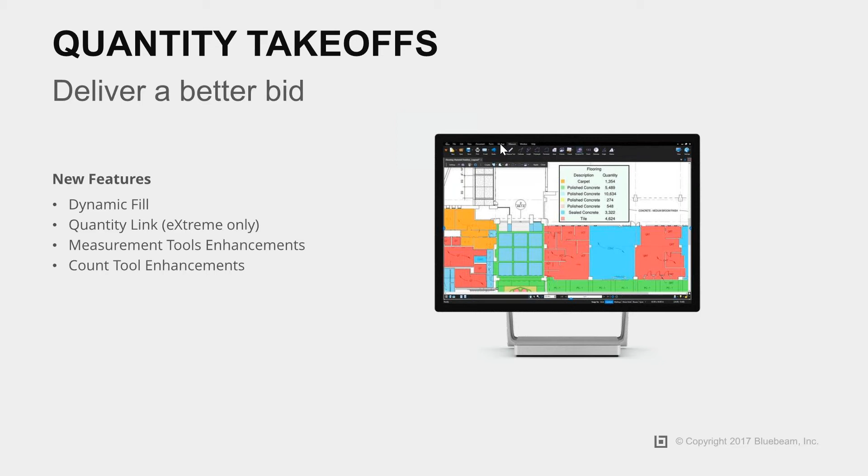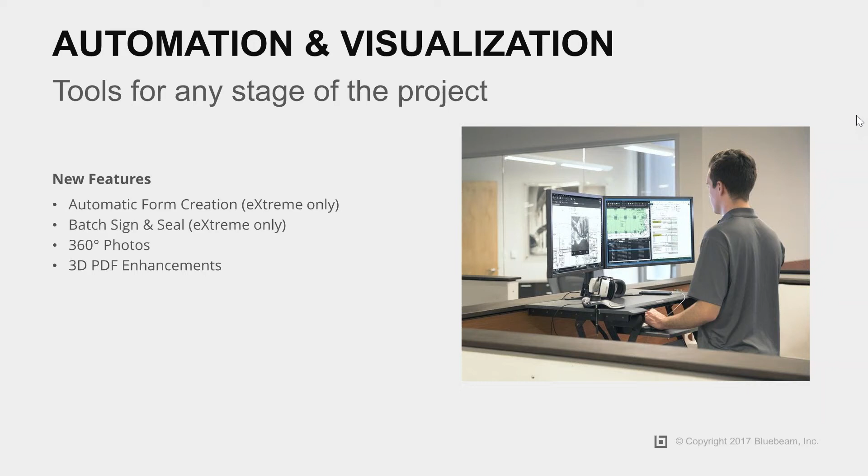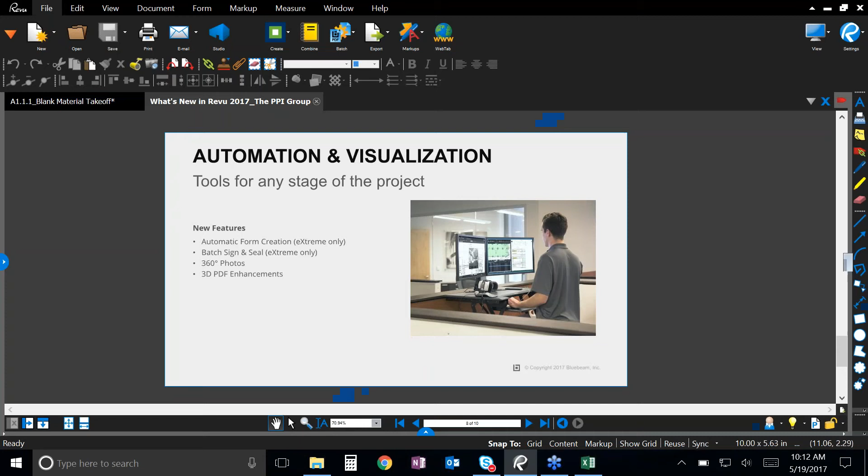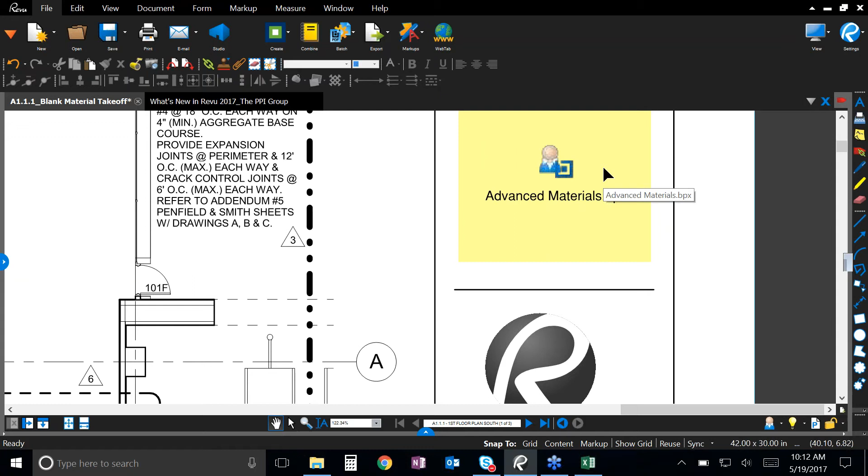Into the demonstration, without further ado. Again, going to be showing you the two buckets, starting off with the takeoff features. Let me go ahead and open up a document here that we're going to be working on. Right off the bat, you'll notice in the corner that there's a profile embedded into this document—profiles are saved configurations of our interface. Someone on my team created a profile with tools and custom columns, so all I had to do to get all the tools I need for today's demo was double click here.

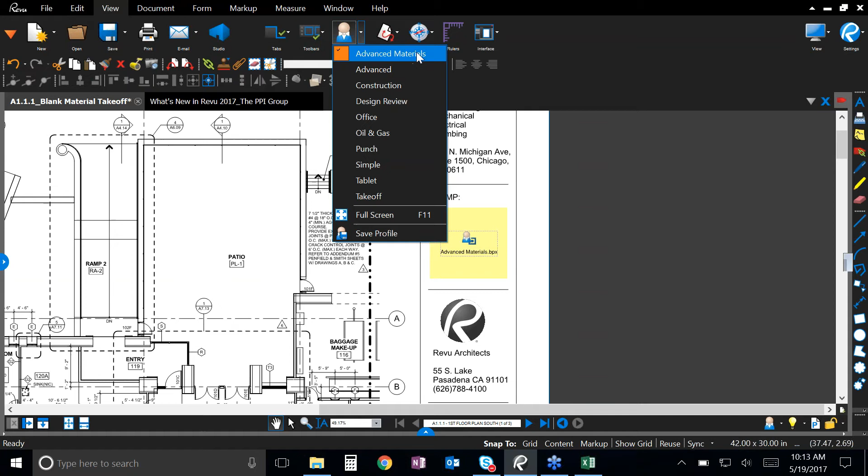And all of that information was loaded into Revu for me, so all I had to do was double click and push open. I won't right now just because I already have it loaded. Just to keep me honest, you can see that I'm in that profile now.

So let's take a look at what happened when I double clicked on this profile. We'll start with the custom columns that were brought in here. Down below in my markups list, you'll notice I have two custom columns, and we can take a look at both by clicking on the little gear wheel and going to custom columns. And here they are.

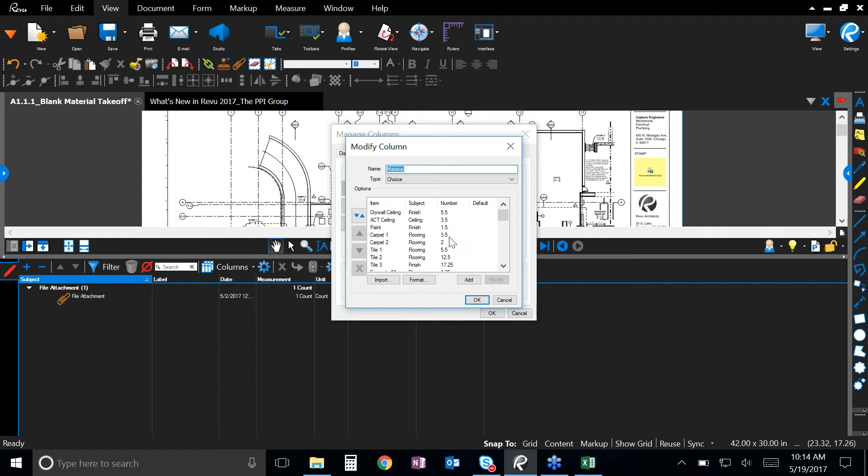So the first one is my choice column, and we can take a look at what this looks like. We have a bunch of different materials here, all associated to a cost. We put in a cost for, if we take a look at carpet, $3.50 per square foot.

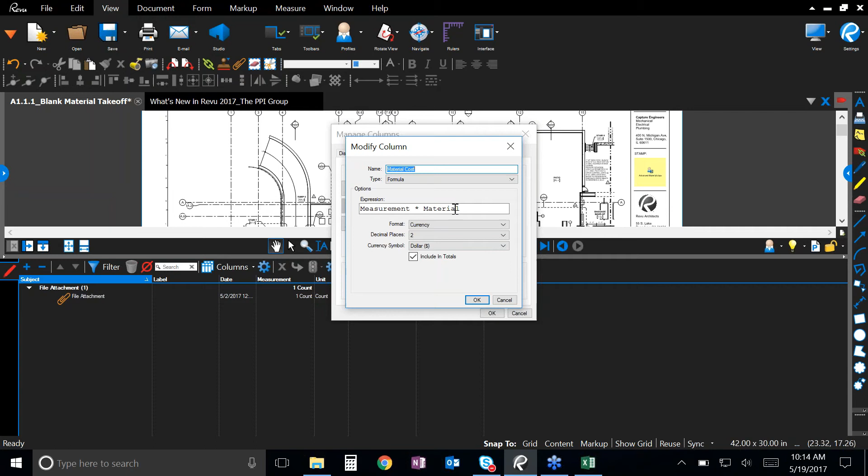So all this information is going to be loaded for me when I'm going through my demo today. The second custom column I have here is for material costs, and you'll notice this one is actually a formula column. So Revu is going to be doing some math on my behalf, which is fantastic because I don't want to get out my calculator—it's even faster than anything you can imagine. What it looks like is taking our measurement that we're going to be making, multiplying that by the material cost, and then it's going to give me the total as I'm doing my takeoff today.

So these custom columns were loaded in with this lovely profile, and also off to the left-hand side, if we go to our tool chest, you'll notice there's an advanced material takeoff tool set with all sorts of different tools that have been preloaded. Lucky me, my takeoff and estimation work today is going to be so fast because all of this was done behind the scenes.

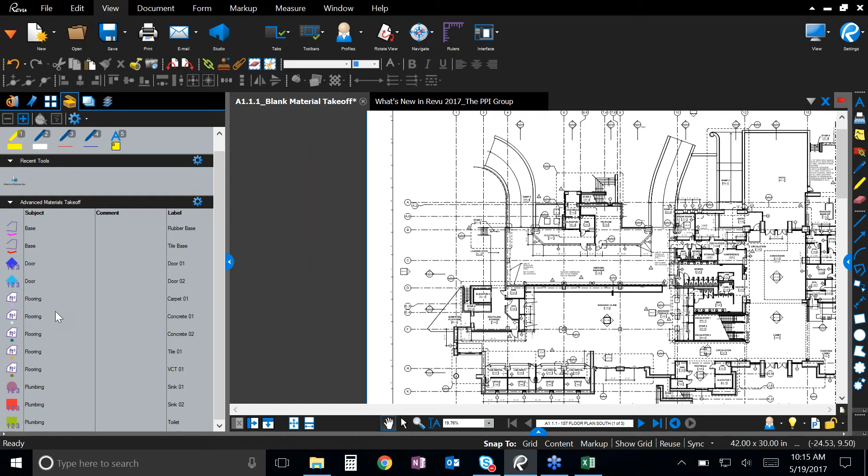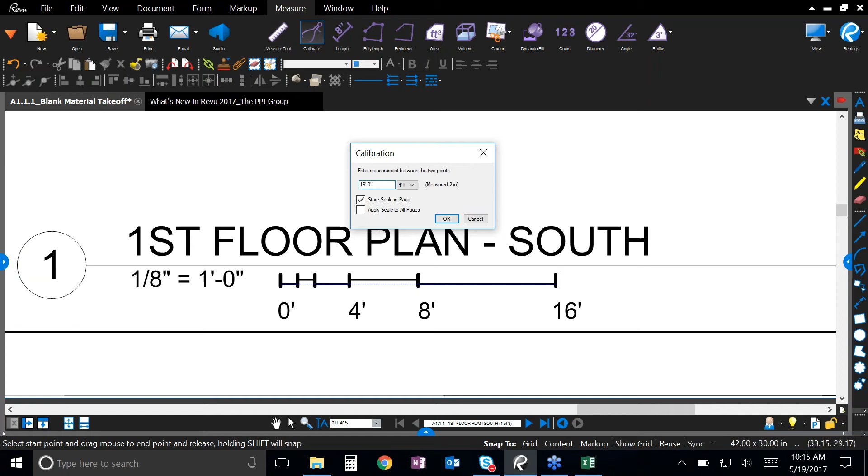With any sorts of measurements within Revu, of course, you want to start off by calibrating the document, making sure Revu knows exactly the scale we're working with today. So I'm going to go ahead and take the longest point I can, push shift on my keyboard so I get that straight line, and I'm going to make sure Revu knows this is 16 feet. Let's go ahead and double check my work, make sure everything looks good. And sure enough, we are good to go—the calibration was successful.

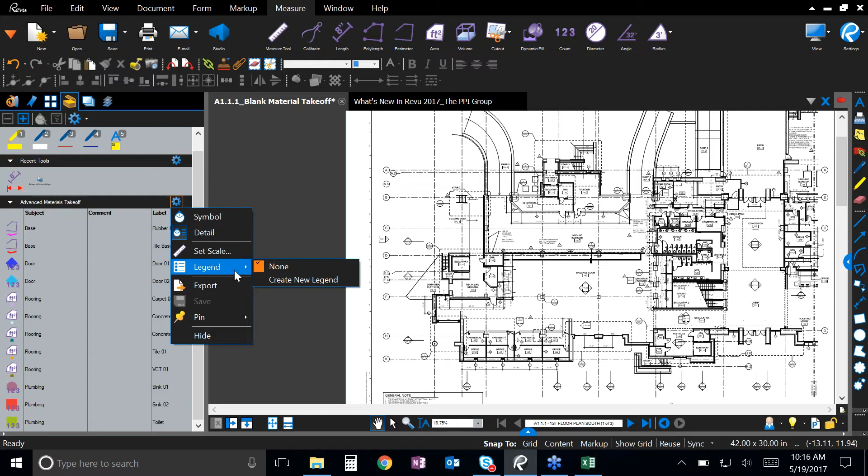The other thing I want to do, just a suggestion and best practice from what we see other customers doing, is going ahead and setting up a legend. Legends aren't new with Revu, but it's a nice best practice because you get a good screenshot of everything we are going to be putting down on the page. So I'm going to go ahead and create a new legend and set it down here on the page. Let's just make that a little bigger.

I'm also going to want to go ahead and change or add a different column here. So I'm going to want to look at my label column as well—all sorts of different options here, but for now, just label and push OK. So now we have this new information added here, and now we're good to go.

So let's jump into things. I am so incredibly excited to show off this, the first new feature to Revu 2017. Previously, if you wanted to take an area measurement of, say, this bathroom, you would go to your area measurement and click around each point in the room, or click and drag if you were lucky enough to have a simple enough layout, and then go through all the different measurements you need. But I'm happy to say there's an even faster way of doing things now, and it's called dynamic fill.

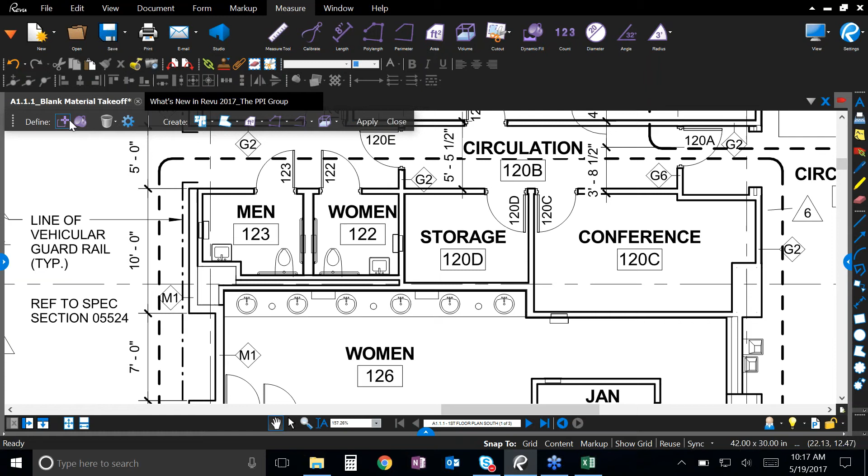If I click on dynamic fill, I can go ahead and add a boundary line here. So if I wanted to go ahead and close off my two bathrooms, so Revu knows this is the boundary of the space I'm trying to take a measurement on, I'll do that quickly. Then I can go ahead and grab this nifty paint bucket tool and actually fill in the space. So you can get really granular, zoom in, make sure you have everything highlighted.

The second one I'll go a little faster on. But it's really great, like adult coloring. You're able to enjoy having that new feature. I think it's just super satisfying to go through each room and highlight all of this information. I was able to fill in those two bathrooms.

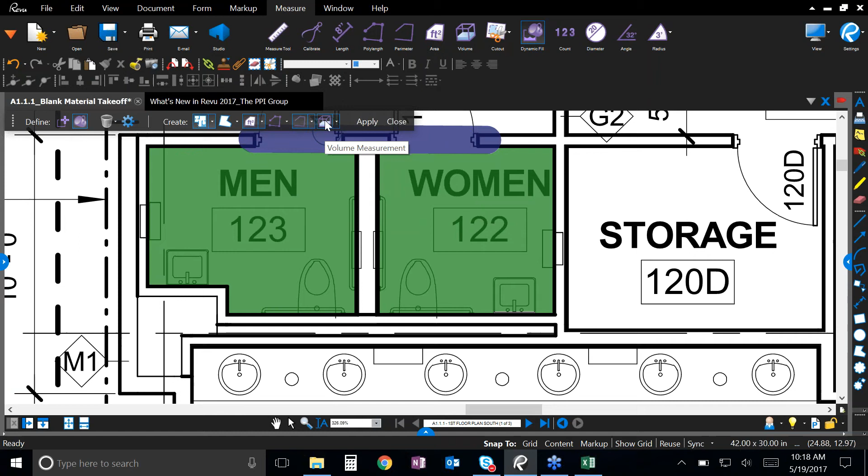Now I can go across the top here and choose every type of measurement I want to apply. I can even create spaces, so if I wanted to create spaces for these bathrooms, I could label this space bathroom. You can do a polygon markup, an area measurement, which we definitely want since we're doing some takeoffs. Let's make the flooring concrete. We don't need a poly length, but let's do a perimeter measurement, and let's get some tile base, sure, or volume. That's all I need for this specific takeoff. I'll click apply, and all that information was applied to these two spaces with just a click of a mouse.

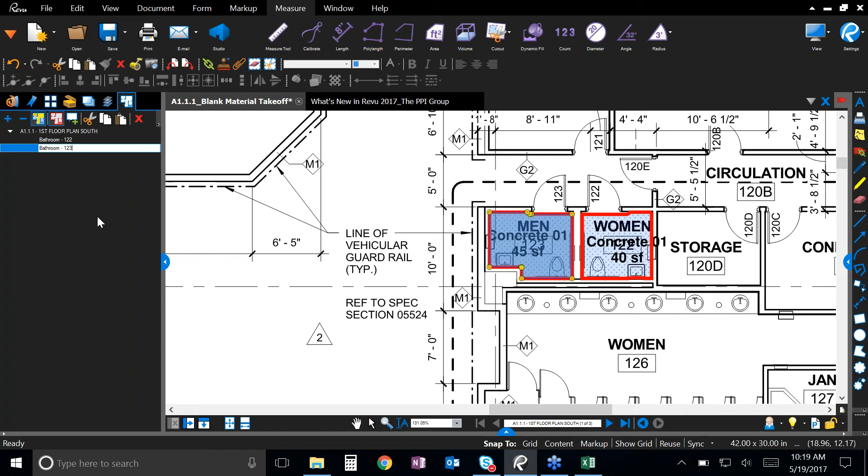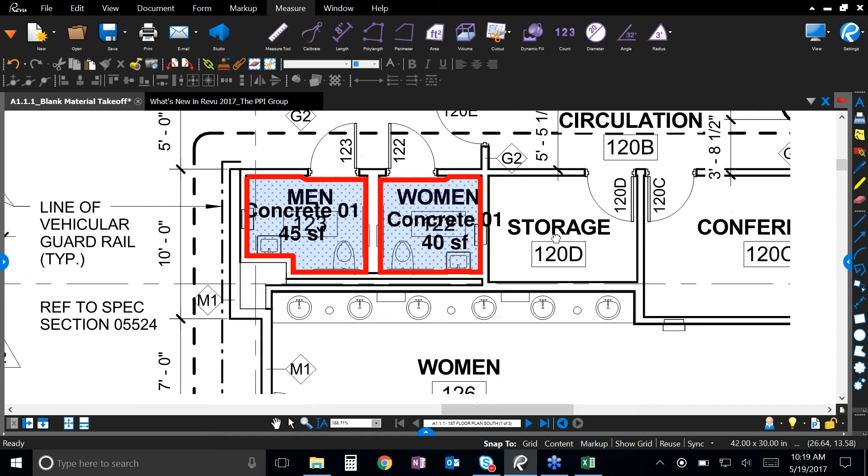I can go through here and make sure my spaces are appropriately named. So if I wanted to name this bathroom specifically room 122, and this one room 123, you can do that no problem, editing the information however you need to. If you make a mistake, you can click control points and bring out your measurement. You can also control the boundary line so it's the right size you need, making sure it matches the walls here. I just did that quickly to show it off, but it's a really great feature for delivering accurate information.

Another great new feature is our polylength tool. Let's take a look at these sinks here. If I was trying to figure out how much pipe I need to run between these sinks, I'll go through each of these sinks quickly and click enter. Now it'll give me a running total and a breakdown between the sinks of each measurement, as well as that running total at the end, so I can see how much pipe I'll need to order and what it'll look like between the sinks.

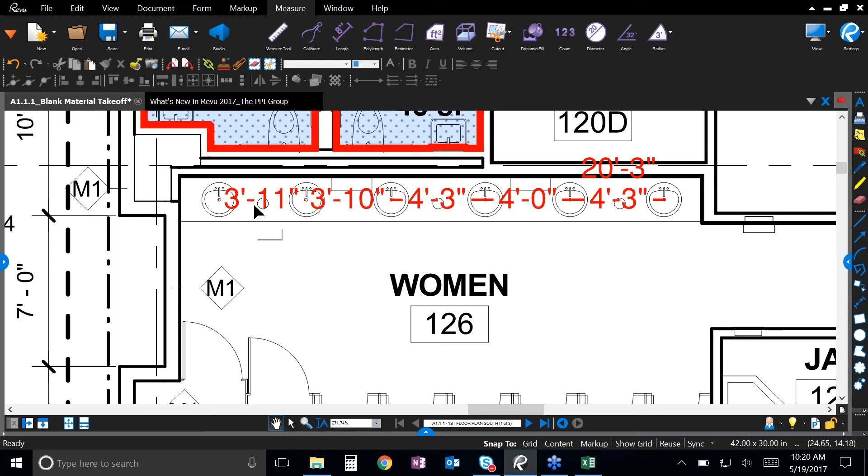If I wanted to break off two of these measurements from the rest, it's really simple to do. All you have to do is right-click and split. Now this is split from the other total, and both of them updated with the control points we had put in. I'll go ahead and put that back there for now.

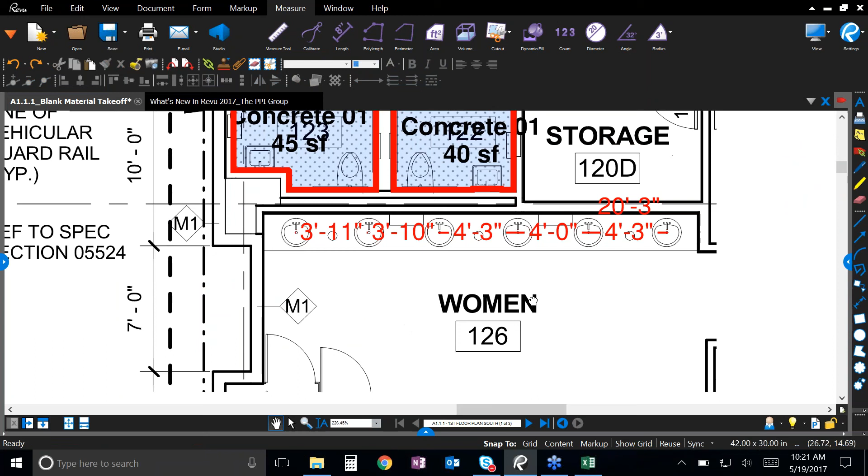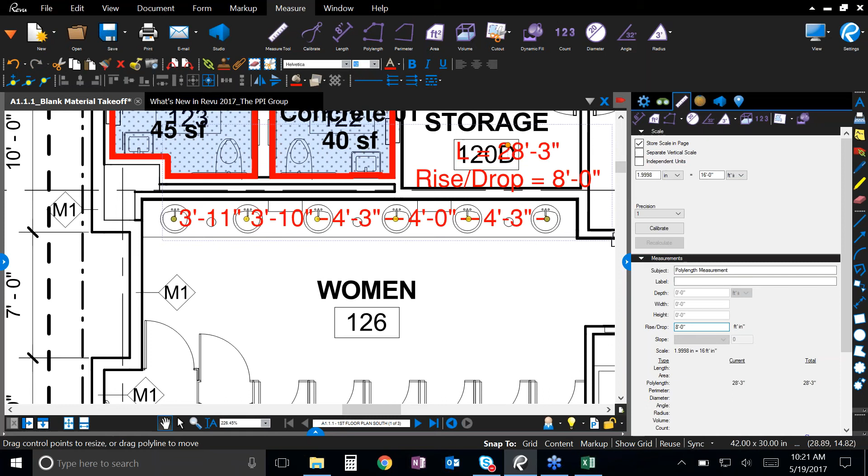Now I'll show you one other great new feature, which is rise and drop. So if I wanted to go up a floor, or in this example down a floor with my pipe, I can now account for that. If I wanted to put in that there's an 8 foot drop to the floor below it, I can put in 8 feet, and that information has updated for me here, as well as my full total.

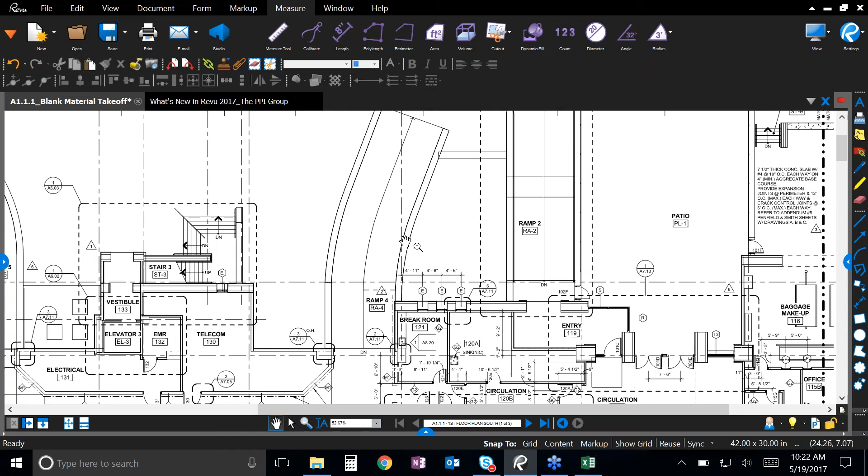Moving right along, we have a beautiful ramp here. If you've had to figure out calculations in Revu previously, trying to account for slope of a roof or slope of a ramp, you were probably building custom columns down below with all sorts of trigonometry and math. But I'm happy to say that Revu 2017 is going to make your life a lot easier, because we can now calculate slope.

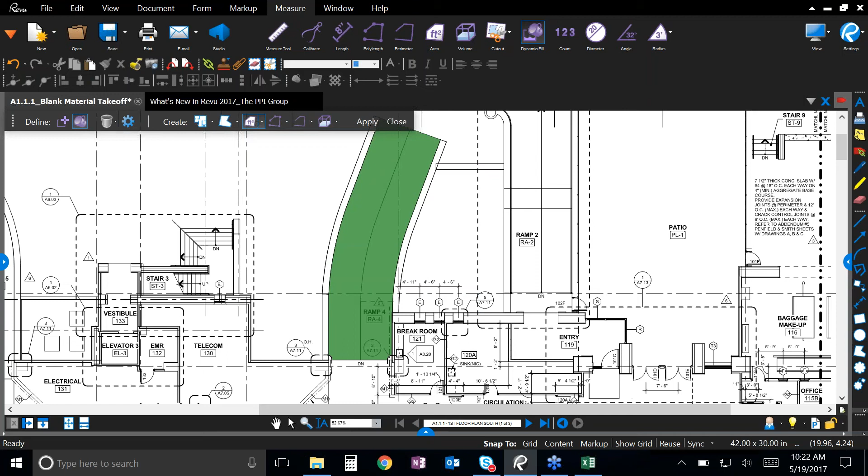Let's go back to our good old friend Dynamic Fill, and let's take a look at what slope looks like. If I go ahead and fill in this ramp, I don't have to do any boundary type activity because it's a totally enclosed space. Then I can go to our area measurement, do concrete again, and apply. Now I have our measurement here accounting for the area.

Let's go ahead and add our measurement of slope here. If I wanted to make sure Revu knows there's an 8-degree slope here, I can push enter on my keyboard, and right away our area measurement updated with that slope of 8. All that math is being calculated for us, and we don't have to do it ourselves.

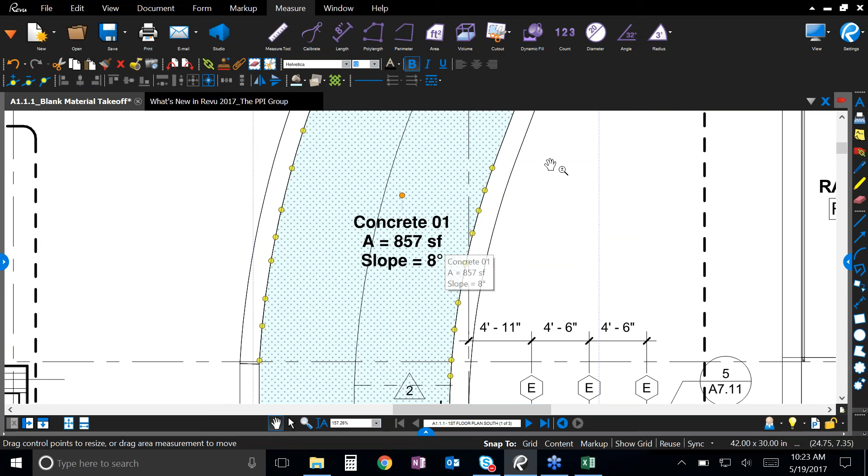Isn't life lovely? Great, great feature. But another one that I want to show off today is a cutout.

Previously, we only had access to the polygon cutout, which was really hard if, say, you had to make a circle for a manhole cover. So if I am going to have a manhole cover on my ramp 4 here, keep your eyes on the area measurement. As soon as I apply our new manhole cover, it'll take that area measurement and subtract it from our total. So it can account for these circular cutouts now, and it's all updated automatically.

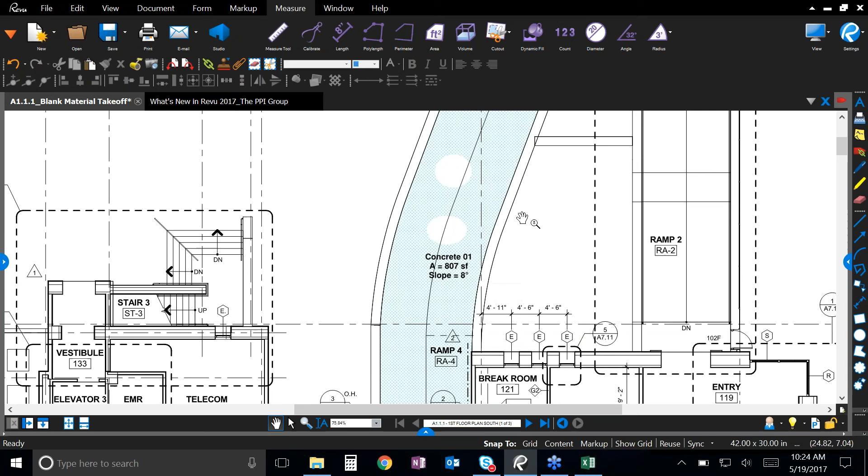All right, so we're moving along with our takeoff. Now we need to take a look at sinks. I need to know how many sinks are on this wide format drawing so I can account for them and make sure that I'm ordering enough sinks.

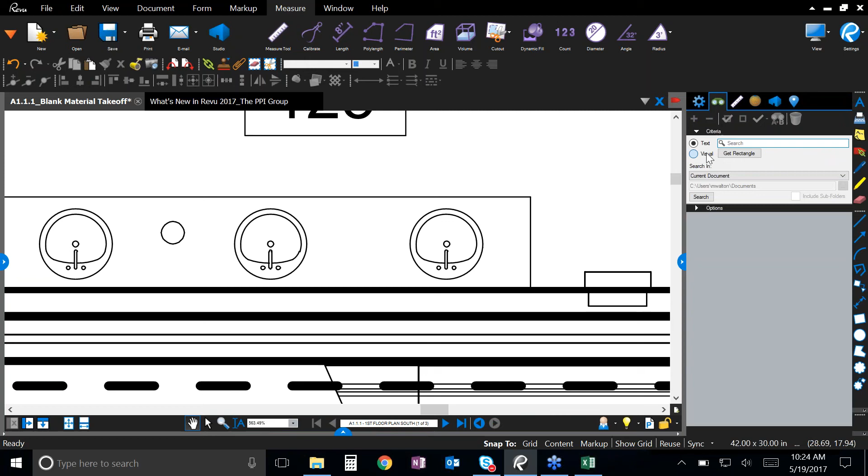So previously, what we would do is go ahead to our friend Visual Search, grab a rectangle, go around our sink here, and click search. Now Revu goes through this entire document, searching for these sinks, and it will take the visual properties of the sink and look at multi-directions. For example, it will account for the sinks that are facing the other way.

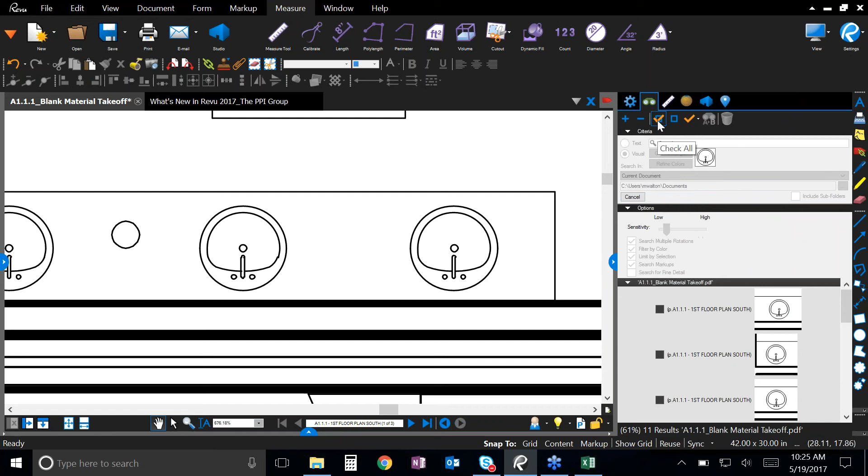And it did just that. It went through the entire document on my behalf and found all my sinks. So now I can go ahead and count them all. I'm going to highlight all of them, make sure all of them are checked off down below, and then go over to my count measurement.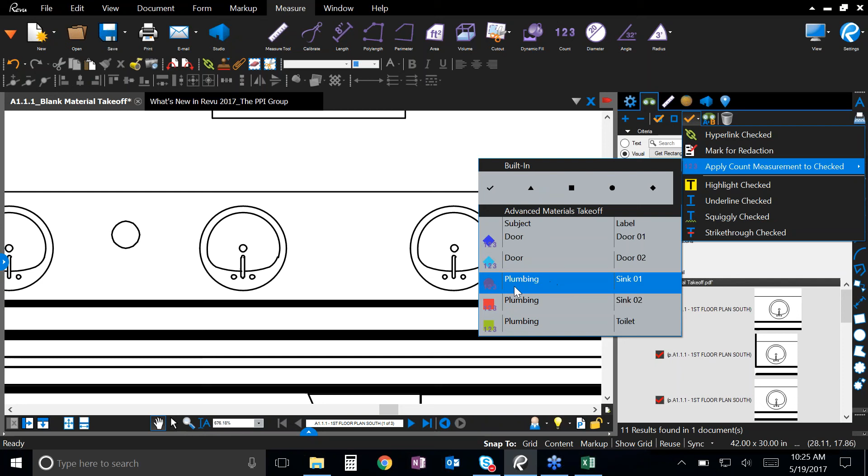Previously, all we could do was apply a count with one of these visual properties above. Now, in Revu 2017, you can apply a markup with a cost associated to it, using this visual property, all within a click of a button. If you remember, this was loaded in my profile for this document. I click on plumbing, and there we go—all my sinks were highlighted.

If I go down to my markups list, you will see that I have my count, 11 sinks, and I have my material cost. All of these purple markups on the page are associated with a cost, and Revu has that running total for me down below.

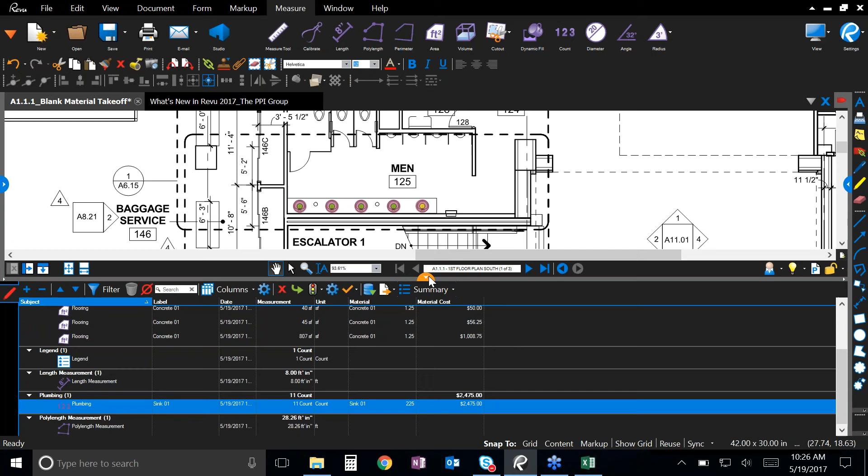The fun with counts does not stop. Let's take a look at creating your own. If you wanted to create your own count markup, all you would have to do is take a snapshot of this toilet. We're going to just do toilets today. I'm going to go ahead and paste that down onto my page, and we'll move it up here.

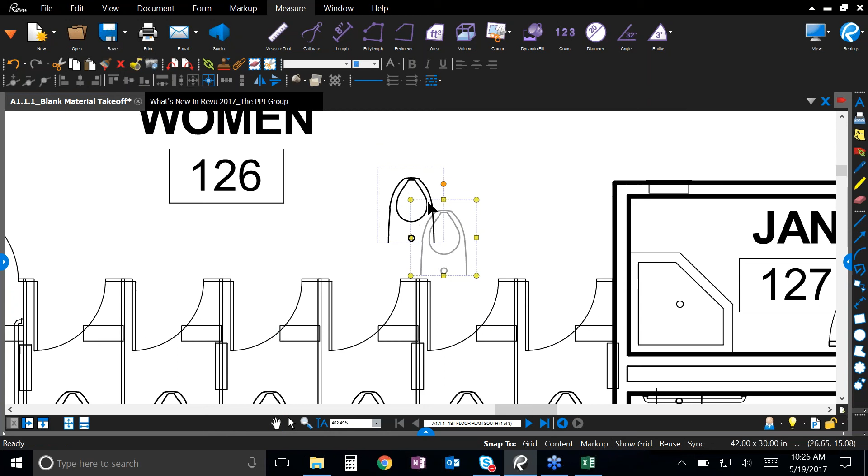Right-click on it, and you can change the colors. I'm going to go ahead and change this toilet to green, so we can make sure we see it appropriately. And I'm going to add it to my tool chest in my advanced materials takeoff, so now it's down here at the bottom.

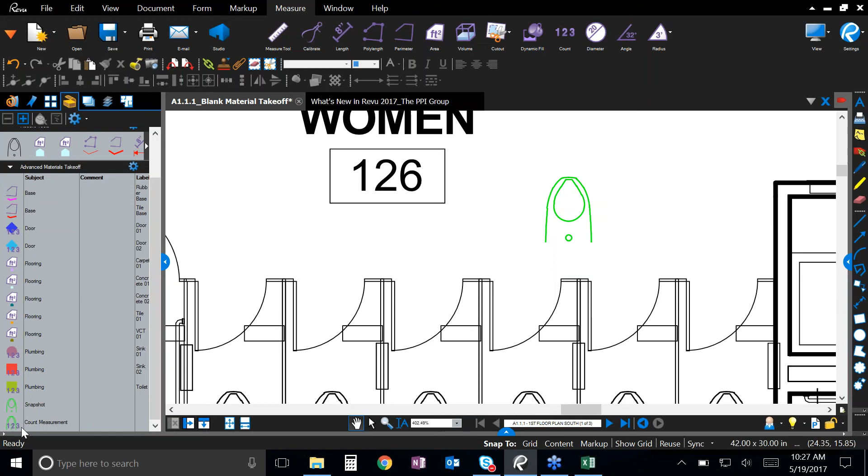And I want to make this into my count tool. So I'm going to make sure I click on my new toilet down here, right-click on it, and create count. Now I have that exact same markup with a 1, 2, 3 at the bottom, and that is now a count measurement. So then I can go through my document and count my toilets this way if I'd like to. All that information is down below, of course.

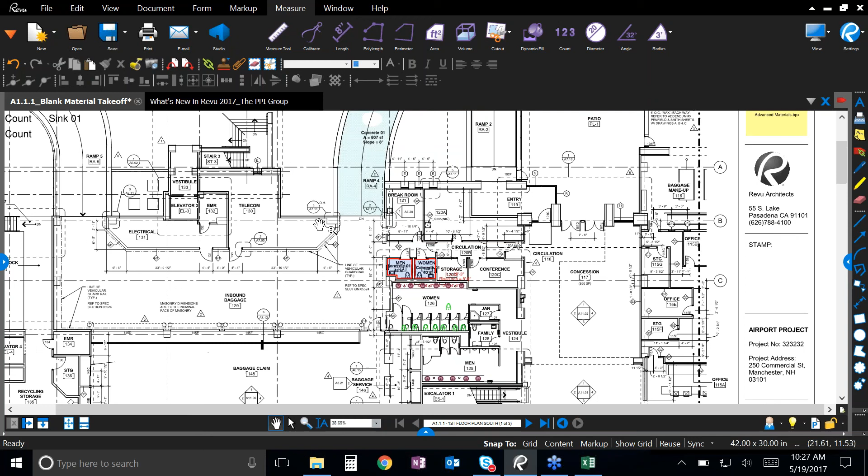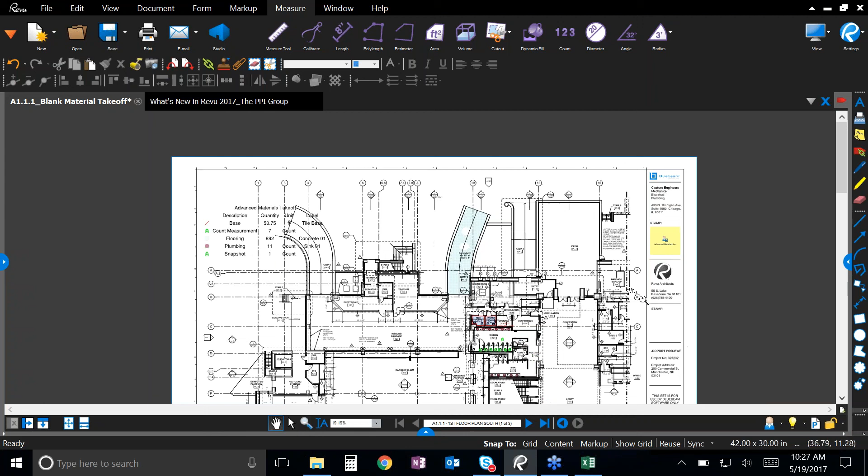So we have this lovely takeoff that I've been working on. It's beautiful. And there's a few ways that I can start sharing this information. Of course, we have this legend that has been updating for me with every markup that I've placed down on the page. We also have our markups list where we can create summaries and send that information off to other people. But with Revu 2017, one of our new features is called Quantity Link.

So basically, what that looks like is this. All of this information that's been going on the page has been linking to my Excel document for a bid, all behind the scenes. I have not had to put in this information—it has all loaded for me.

Really, really simple process to get this set up. So if you have your bid that you have all your information loaded into, you don't have to recreate this Excel document every single time you're doing a takeoff. All you have to do is right-click here and change the source file.

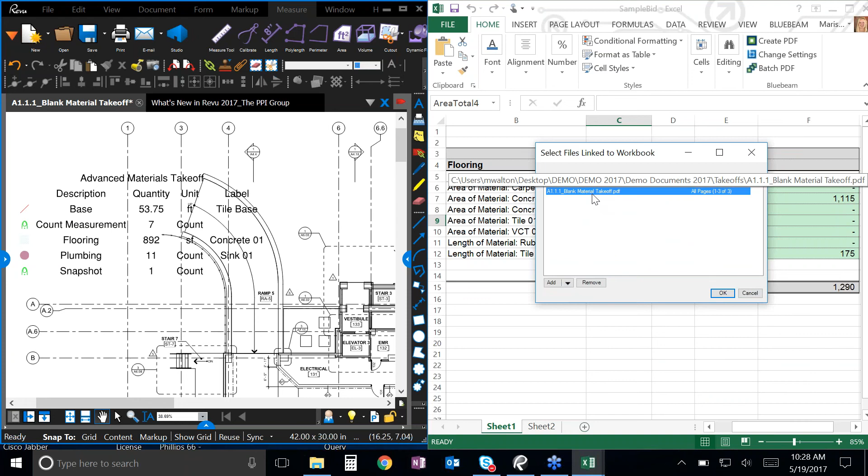If I wanted to work on a different file in Revu and have all that information loaded into this Excel document, I change my source file. Let's go ahead and remove the one we've been working on, and add this material takeoff. Click OK here, and let's open it up in Revu so you can take a look at what it looks like.

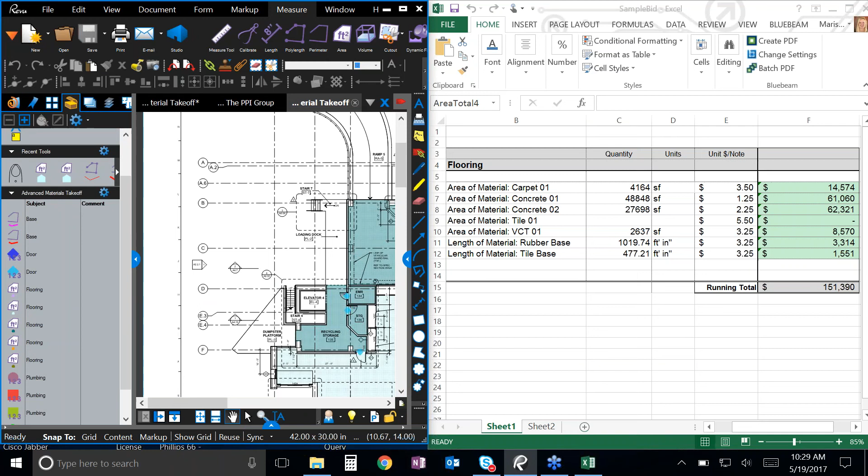This takeoff is a little bit more detailed than the one I just went through with you. But you'll notice that if we want to make sure everything is actually linking like I say it's linking, let's take a look at concrete 01. As soon as I make this area measurement, keep your eyes on my Excel document. You'll notice the quantity changes as soon as it goes onto the sheet here. It keeps updating. So this live link into Excel is going to speed up the process even further.

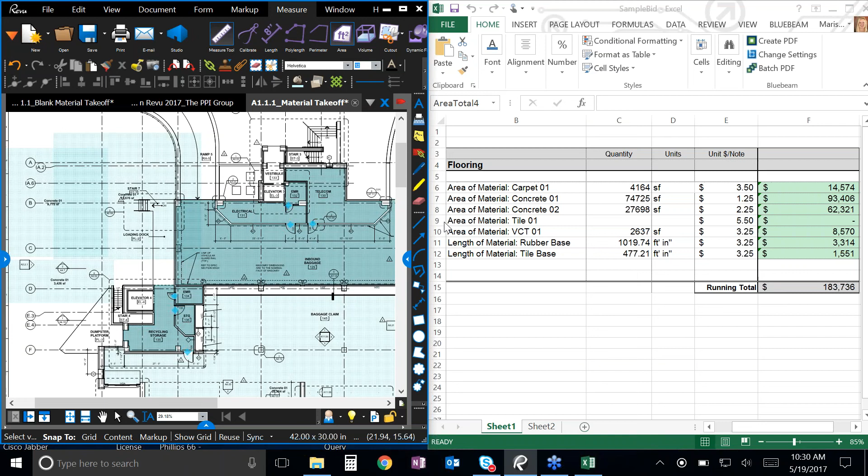So this actually rounds up the first portion of the new features focused around takeoff.

Next, I'm going to take a dive into our visualization and automation tools. Let's go ahead and take a look at those automation tools first. Let me close this up real quick and open up an example of our first one.

Here I go. I have an RFI template here, but there's no form fields. I can't fill this information out. Of course, I can print it out, but what fun is that? In the past, what folks were doing in Revu was making their own form fields on each of these lines. But now, with Revu 2017, we have auto form creation.

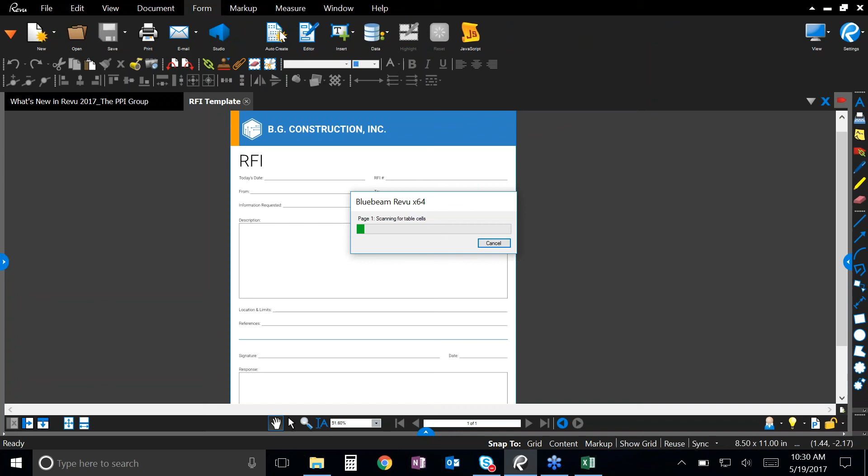So if I go to Form up top and click Auto Create, Revu just filled in all of these different form fields for me. It even found the signature field down here at the bottom and this description text field. And if you look off to the left-hand side, all of them are labeled with the text that is in front of the form field, and assigned the correct form field type, again with that signature down below.

This one I think is going to make a lot of people extremely happy. It's just a great new feature to speed up time even more.

All right, next up is batch sign and seal. This one I think is going to make a few of your mouths drop to the floor. I imagine this is going to save a lot of people a lot of time. So I'm going to set up this example by going to our batch features and sign and seal.

I'm going to add some files here. These are all files that I need to put my signature on and stamp my approval on. They're going to be all different sizes of files and document sizes. It doesn't matter. I'm going to load them all at one time and click Next. And now it's going to give me a nice preview of what's going to happen on each of these sheets.

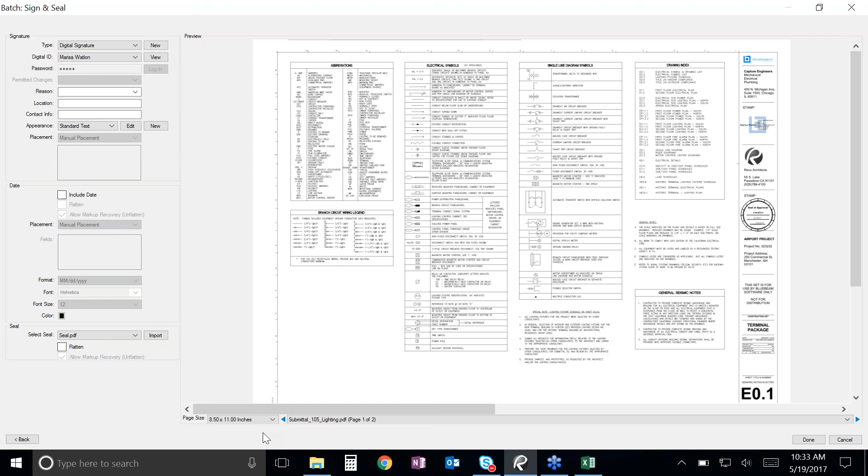So I'm going to need to see how that looks on other pages. We have an 8x11 here. I'm going to go ahead and click on that one. Same thing, I'm going to move my stamp here and my signature to where they need to go. And on the last page size, I'll do that as well and move my information to where it needs to be.

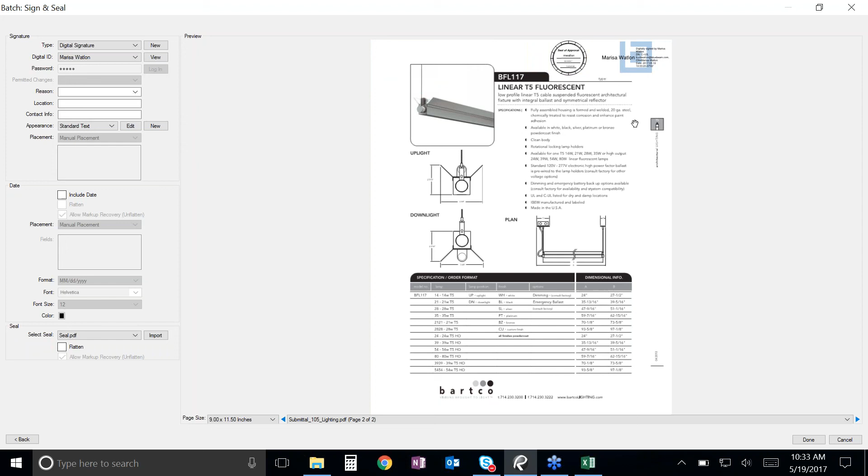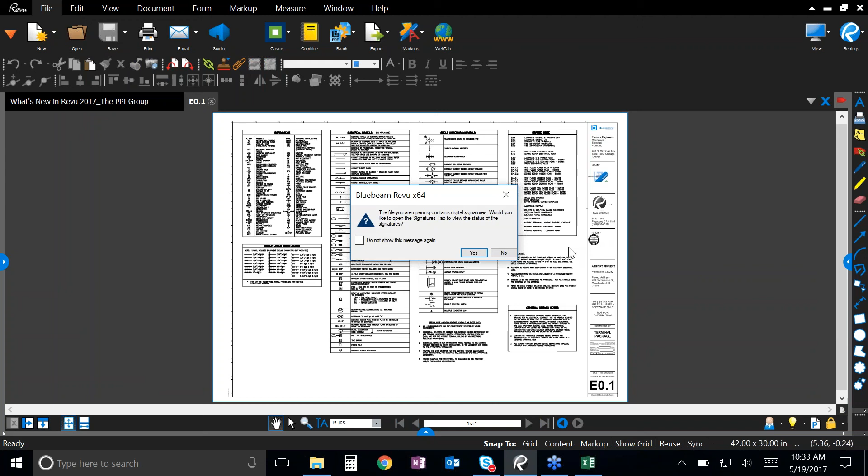So what's going to happen is I'm telling Revu where it should be placing my signature and my stamp on these specific sizes of paper. Then all I have to do is click Done. Let me open that up. It applied my stamp and my signature to each one of those pages automatically. So you can do that on hundreds of different documents and put your signature and your stamp on it.

If for any reason that PDF has been changed at any point, it will wipe your signature from that file and it's no longer valid, because obviously we want to protect your security and make sure that your signature is on the document that you intended it to be on.

All right, so last but not least, of course, is our visualization enhancement. So we're going to start off with an example for 360-degree photos.

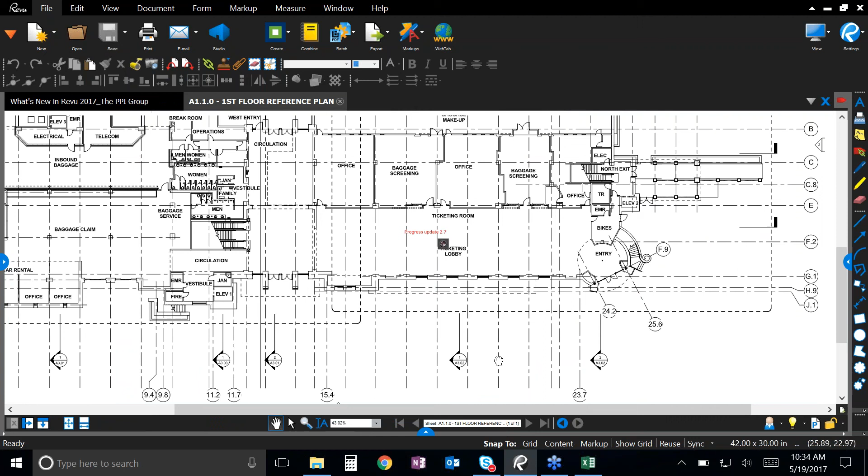Here is a good example of that. You can notice that there is actually a picture embedded into this PDF with a note that says Progress Update. All I have to do is double click on it, and you'll see up in the corner that it says 360 degrees, because this is a 360-degree photo.

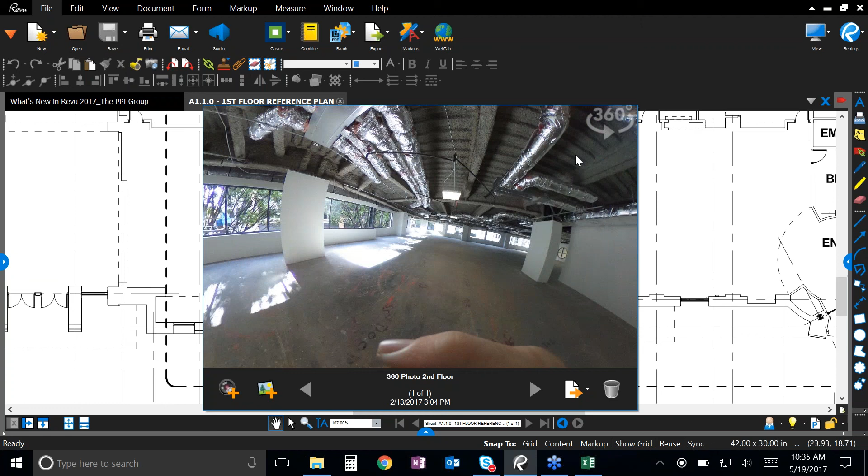I am able to share what this space looks like with this photo. You can even zoom in and out if you'd like to get a good sense of the space at every degree.

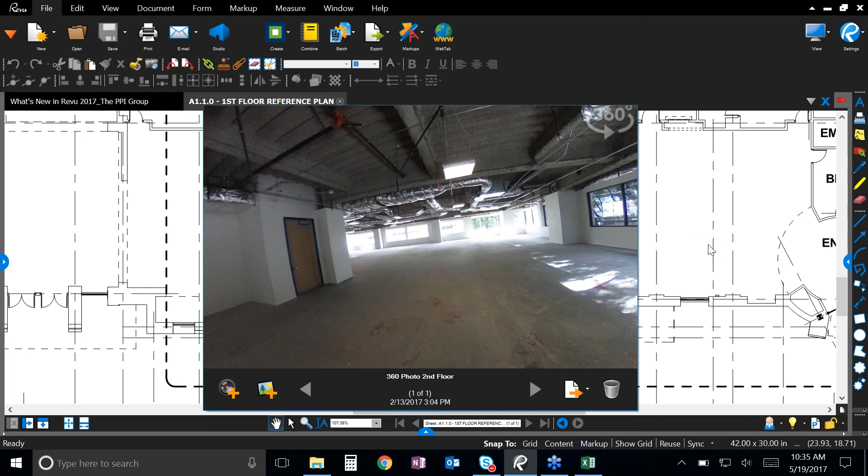We support a variety of different 360-degree cameras, all of which you can find on our website, or feel free to reach out to PPI Group. They'd be happy to find out if the 360-degree camera you currently have is supported in Revu. We are constantly adding more, so that list will be changing and updating.

I will go ahead and move on here to the last enhancement we've made with Revu 2017, which is around 3D PDFs. So I'm going to open up a 3D PDF here and introduce you to our model tree and what that looks like.

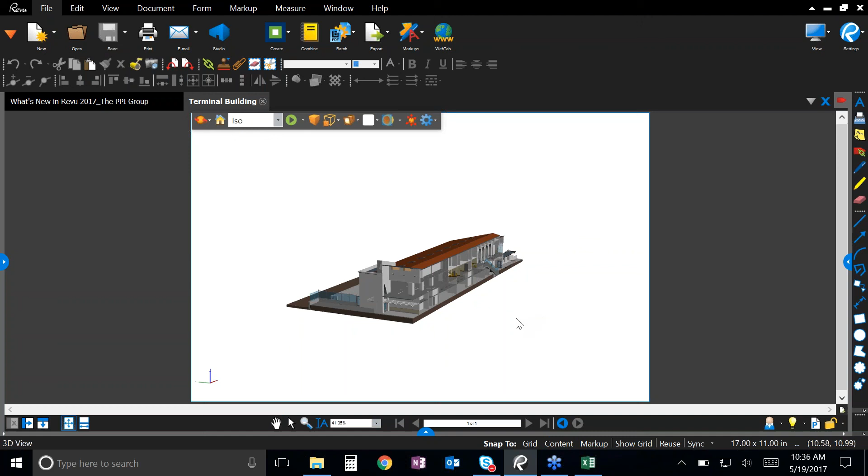Here is a great 3D PDF. I can spin it around, I can take a look at different aspects of it. That's all old news, we've been able to do that in Revu for a while.

But let me go ahead and bring my 3D model tree down here to the bottom. You're going to notice that it looks very familiar, similar to our markups list, that Excel type looking spreadsheet of a lot of data down here.

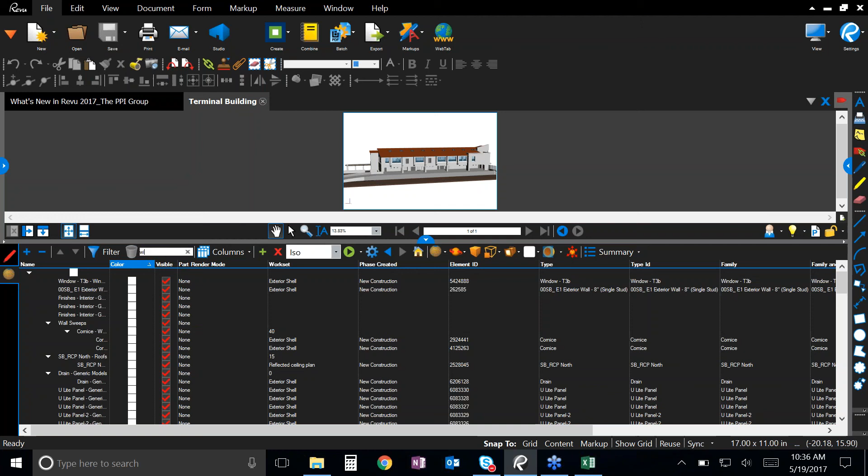Some of the changes that have occurred: there is now a search bar. So I can type in Windows, and Revu went ahead and grayed everything else out on my 3D PDF, so I'm able to focus in on my windows. I can click on it, and it takes me to it down here in the model tree, the specific window.

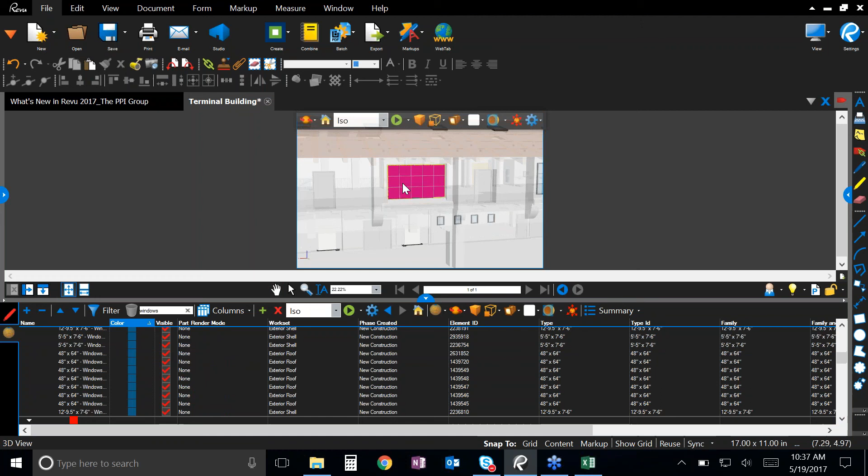I can change the metadata in here now. If I wanted to change the color of this window to really draw attention to it, I can do that. I can even change this element ID down below if that was supposed to be a 9 instead of an 8.

Being able to manipulate this data down below even more so, and search for the features that I need to find within my 3D PDF.

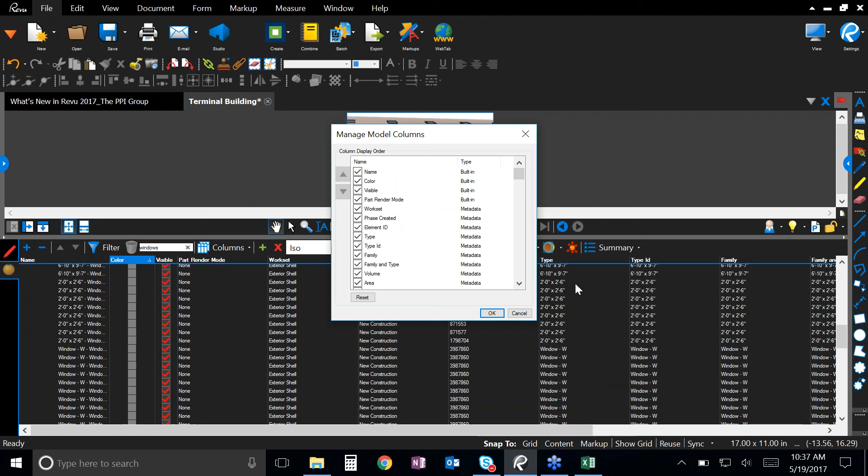I really do want to show off quickly that there are some columns that are turned on, and Revu automatically is going to show you the columns down below here that have the most metadata associated with it. But if you wanted other columns turned on, you can absolutely do that. All that information that's being brought over from the document or the software this was created in is brought into Revu. You can turn it on and off and view it as you need.

Of course, you can always create a summary of all this information and export it out of Revu.

And that actually wraps up our new features. I hope you enjoyed all of the different features that have been added.